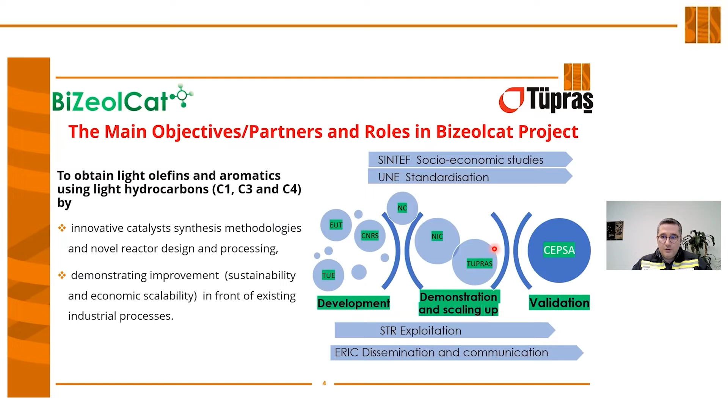So here is the main objective of the BiZeolCat project, to obtain light olefins and aromatics by using light hydrocarbons, by innovative catalyst synthesis methodology and novel reactor design and processing, demonstrating improvements in front of existing industrial process. On the right side are our Bizeolcat partners from development stage to validation stage. As TÜPRAS, we are on the demonstration and scaling up activities of the project. It is work package 4, demonstration and scaling up activities.

The leader was the National Institute of Chemistry in Slovenia, NIC, and we have two tasks in this work package. One of them is related to catalyst scaling up. Another one is the reaction test at the pilot scale. So in task 4.4, TÜPRAS extrudes powder supports that were defined in the development stage of the project and shapes them in pellet form by extrusion process in order to test them in a pilot scale reactor for propane dehydrogenation, butane dehydrogenation, and propane aromatization reactions.

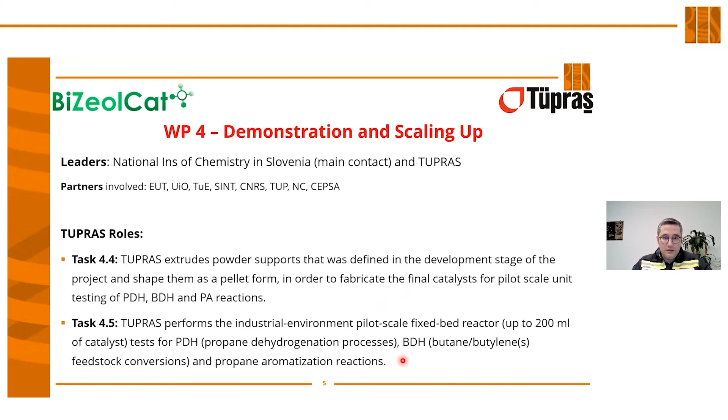In task 4.5, TÜPRAS performs industrial environment pilot scale fixed bed reactor tests for PDH, BDH, and propane aromatization. For the reaction side, today we will discuss and give the results on propane dehydrogenation and propane aromatization reactions.

The final catalyst for PDH and BDH was defined in work package 2 by the technology developers, Eurecat and CNRS. This is lithium doped gamma alumina deposited with platinum and tin. The tin over platinum ratio is 0.7 and lithium is nearly 0.5 weight percent. The catalyst was prepared via a novel process called the surface organometallic approach that was developed by CNRS and Eurecat.

To reach the TRL 5 level for catalyst scale-up, activated alumina catalyst support, gamma alumina, 0.8 millimeter in diameter and 3.3 millimeter in length, has been produced with a classical extrusion process. Our first step is the preparation of the paste. This contains Boehmite particles, and we change the solid loading and the gelation ratio with nitric acid concentration in order to increase the mechanical strength and reach the maximum extrusion yield.

Then, with the paste at optimal properties and viscosity, the extrusion process continued with a die diameter of 1 millimeter and breaking up of the extrudate into small lengths. And then this catalyst was dried at 90 degrees centigrade overnight.

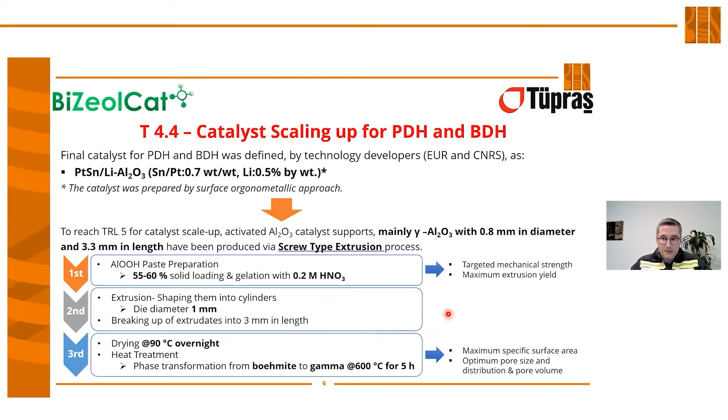And then heat treatment was applied in order to produce gamma phase at nearly 600 degrees centigrade for 5 hours to maximize specific surface area and optimize pore size distribution and pore volume.

Here is the catalyst support production equipment that was installed in our R&D center. This is the Caleva brand extruder 3-in-1 machine. In this machine, we are preparing paste. We can make extrusion, and we can also use spheronizer units attached here to produce a spherical material. This is another mixer in order to increase the capacity, and this is the granulation equipment and also mixing equipment in order to produce kilogram scale material.

In this table, you can see some critical properties of our support. This is the high purity gamma alumina with a very low diameter, and crushing strength is 35 Newton per millimeter. That is enough for the propane dehydrogenation reaction. The surface area is higher than 200 square meters per gram. So we can say that industrial grade gamma alumina support was produced to be used for PDH and BDH for the TRL 5 level.

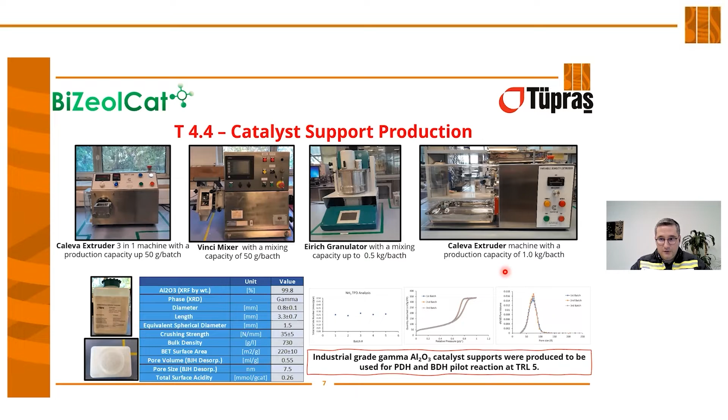You can see in the graph, this was taken from the different batches. This is the NH3 TPD analysis. We obtained the same total acid sites, and we have also the same BET nitrogen adsorption and desorption graph, and also the same pore size with the different sizes. So our production is very robust in terms of the material properties.

You can see on the left side, this was developed by our partner, CNRS, in order to produce 1 kilogram of final catalyst for the impregnation of platinum tin. The preparation of the catalyst, platinum tin on the lithium doped gamma alumina, from 2 grams to 1.1 kilogram has been successfully completed.

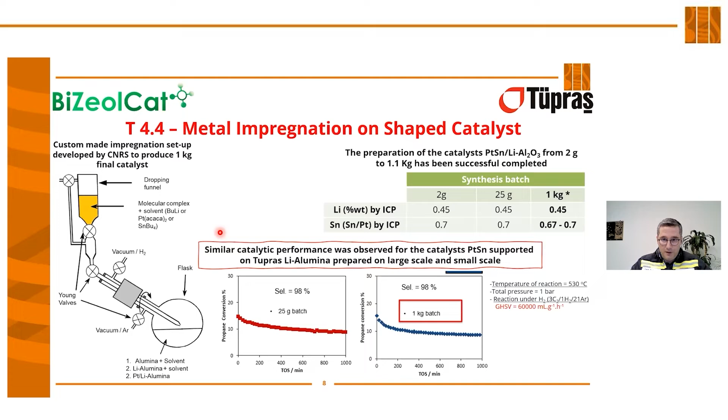And when you look at the ICP results, we obtained very good results when comparing laboratory and pilot scale production. So when we look at the reaction performance, we can say that similar catalytic performance was observed for catalyst platinum tin supported on TÜPRAS lithium doped gamma alumina prepared on large scale and small scale with the same reaction conditions.

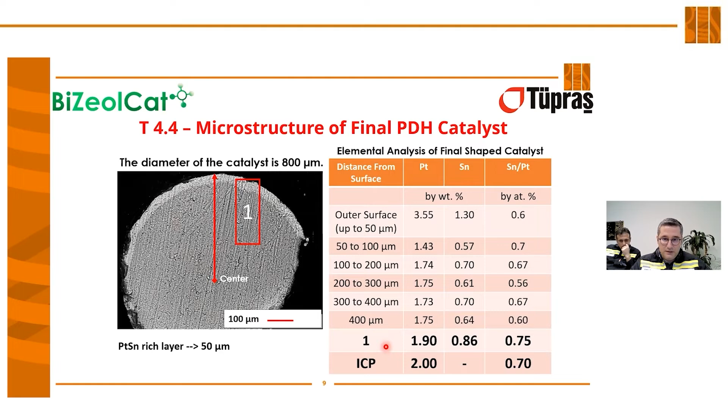So you can see the microstructure analysis of the final PDH catalyst. This is the cross-sectional analysis of our catalyst. We can see the outer side and the inner side of the catalyst. This is the typical distribution of the metal on the support. We have a rich layer of platinum tin on the top of the catalyst, and when we go to the center of the catalyst, the platinum tin concentration decreases. But when we compare with the commercial catalyst, we can say that the distribution is very good, and the results are very similar with the ICP and the SEM EDX analysis.

So I will move to another reaction. This is called the propane aromatization reaction. The final catalyst for this reaction was defined by the technology developer. Here the University of Oslo and CNRS worked on it. It is the gallium modified mesozeolite with nearly 1% by weight of gallium, and the silica alumina ratio is 40 by mole. The catalysts were synthesized by treating commercial zeolite with sodium hydroxide solution to introduce mesoporosity.

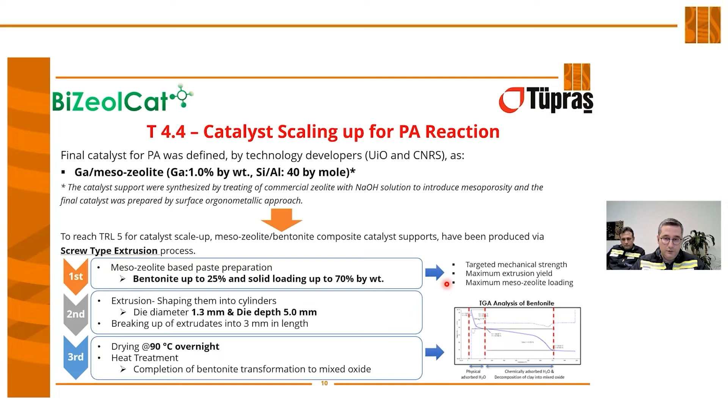This is for the support. The final catalyst was prepared by the surface organometallic approach. This is also a novel technology developed by CNRS. To reach the TRL 5 level, we used the same approach, but this is a little bit different because we used bentonite, and we changed the bentonite ratio and the solid loading in this composition in order to increase mechanical strength, reach the maximum yield and the maximum mesozeolite loading to improve the catalytic activity.

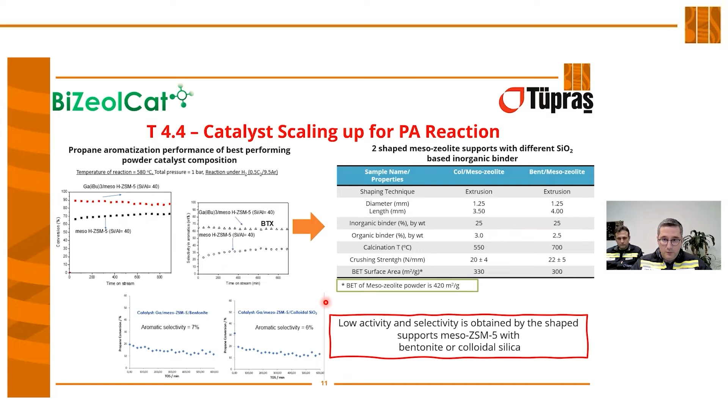So we had to improve this performance by reducing the inorganic binder and also reducing the calcination temperature after shaping. This can be explained by the reduction of acidic protons seen at 4 ppm in the solid state NMR results. When we add inorganic binders, this peak disappeared. When we increase the calcination temperature up to 700 degrees centigrade, we also have an acidic proton peak in the spectroscopy, but the intensity of the peak is lower.

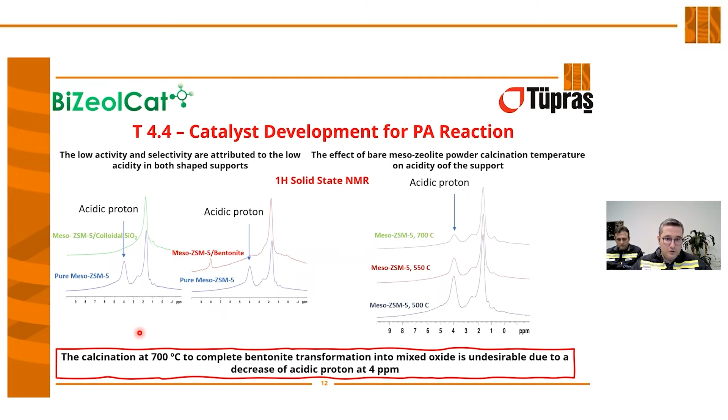So the calcination at 700 centigrade degrees to complete the bentonite transformation into the mixed oxide is undesirable due to the decrease of acidic protons, and it reduced the catalytic activity. So we decided to reduce both calcination temperature and inorganic binder in order to increase the reaction performance.

When you look at the right side, the propane conversion and the mass selectivity to BTX are lower than the powder, but we have very promising results on the propane aromatization. You can see on the left side the material properties, and this is the picture of our catalyst.

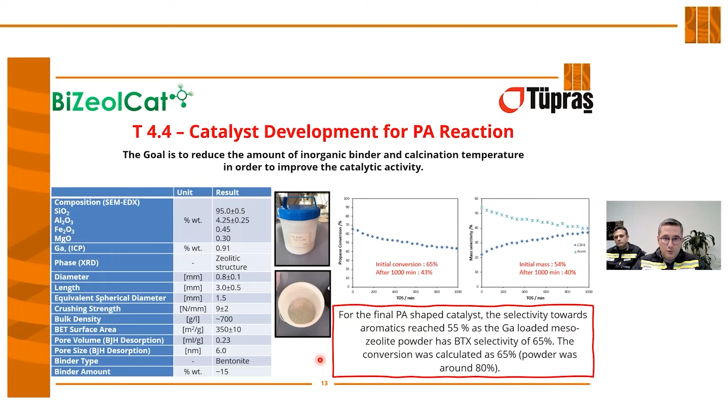For the final shaped catalyst, the selectivity towards aromatics reached 55%, whereas the gallium loaded mesozeolite powder has BTX selectivity of 65. The conversion was calculated as 65%. The powder was around 80. So we have reached similar, promising results, but we reached higher results after modifying our extrusion formulation. Then my colleague Serdar will continue with the pilot scale reactor system.

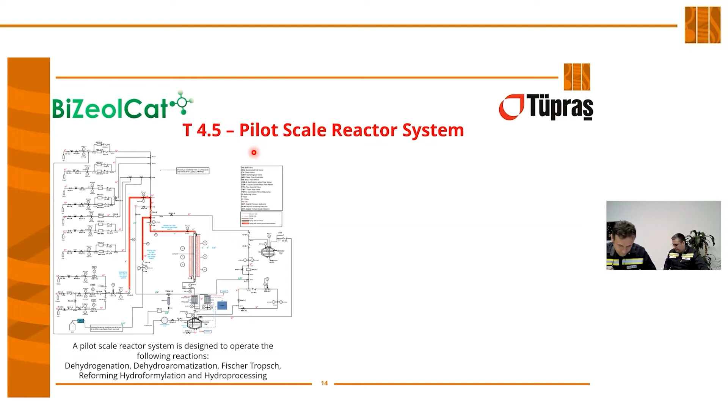Thank you, Cem. Serdar is speaking from Turkish Petroleum Refineries Corporation. I will continue with task 4.5, the pilot scale experiments and our reactor system. Our pilot scale reactor system, called X2L, enables us to do dehydrogenation, dehydroaromatization, Fischer-Tropsch, reforming, hydroformylation, and hydroprocessing type reactions. Of course, this is a custom-made system specially designed for the BiZeolCat project.

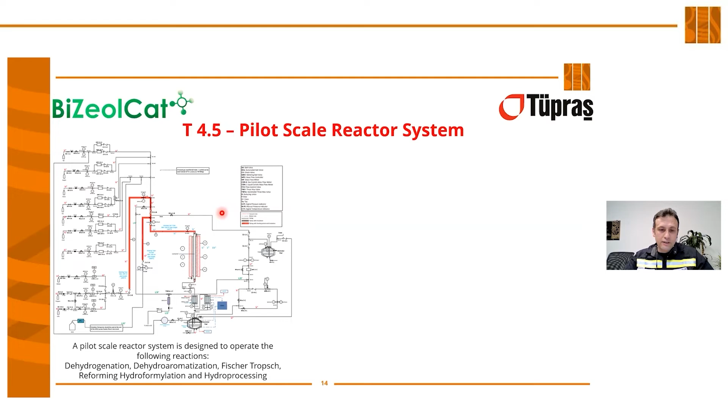This system has its own chiller system. Also, we have a water condenser at the outlet of the reactor. We are collecting the liquids in our collection vessel, and this system can be operated at these high temperatures. The system is also coupled with an inline gas chromatograph, micro GC, and we are measuring the inlet composition and the outlet composition of the products.

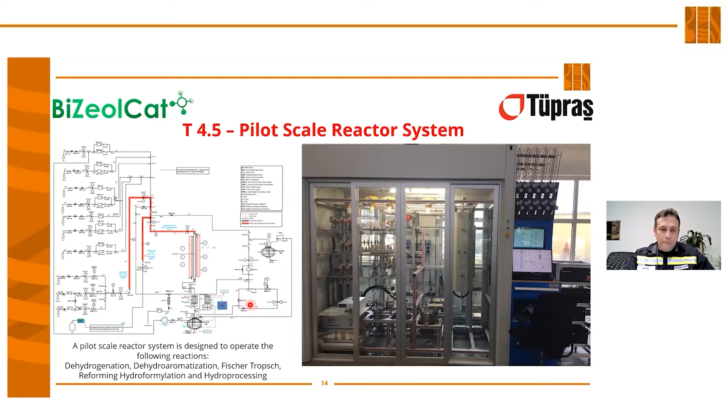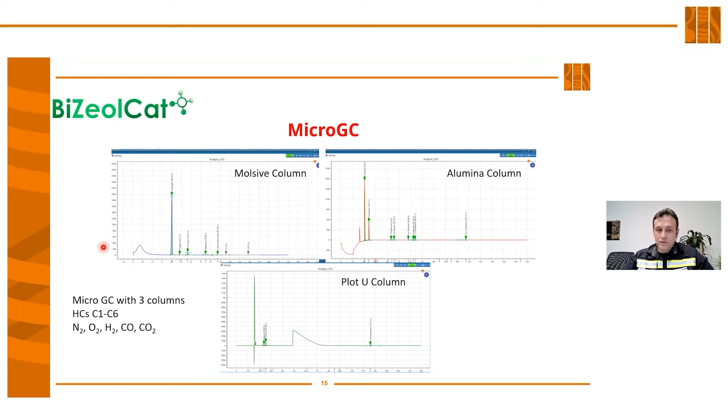The micro GC is coupled with 3 different columns. One of them is the mole sieve column, the second one is the alumina column, and the PLOT column. These 3 columns are capable of measuring different kinds of molecules, including hydrocarbons C1 to C6, and also nitrogen, oxygen, hydrogen, carbon monoxide, and carbon dioxide.

And how we load the reactor. This reactor system allows us to use different diameter reactor tubes, 1/2 inch, 1 inch, and 1.5 inch. We used the 1.5 inch reactor diameter in propane dehydrogenation and propane aromatization reactions. We are loading the catalyst diluted with silicon carbide in the middle of the reactor tube, controlling the reactor externally, and measuring the reactor temperatures inside at 3 different locations.

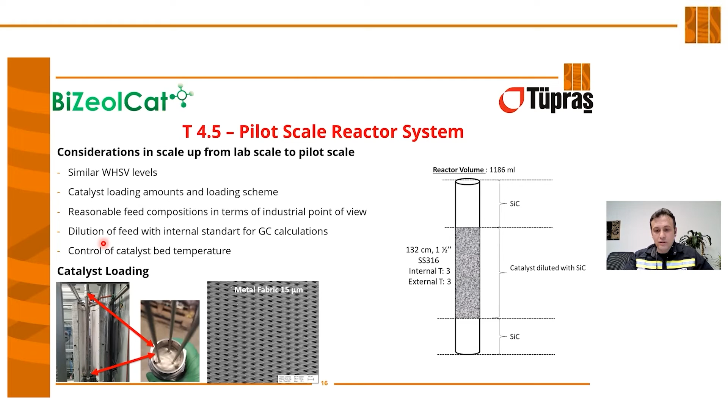We are very good at controlling the catalyst bed temperature, but of course the external temperatures are almost 50-60 degrees higher than the internal temperatures because of the endothermic nature of the reaction. Let's start with the propane dehydrogenation reaction performance at pilot scale. We did a lot of different experiments at lower scale, around 12.5 gram, and all of these reactions are completely repeatable.

We controlled the reaction temperature outside at 590 degrees, and the internal temperature was around 530 degrees Celsius. We maintained the weight hourly space velocity around 5.7. We also feed hydrogen in order to get rid of coke formation during the course of the reaction. Here you see 10 hours of operation. It's a continuous operation, by the way, almost 36 hours of complete operation, including the reduction of the catalyst.

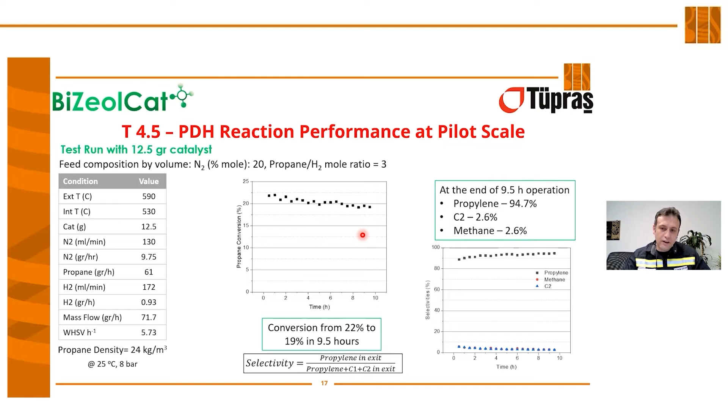We maintained around 95% selectivity at the end of around 10 hours of operation. In this reaction, we also obtained C2s, ethane and ethylene, and methane around 2.6%. The reaction started with 22% propane conversion and ended up around 19% at the end of 10 hours. And we increased the catalyst capacity for the next round.

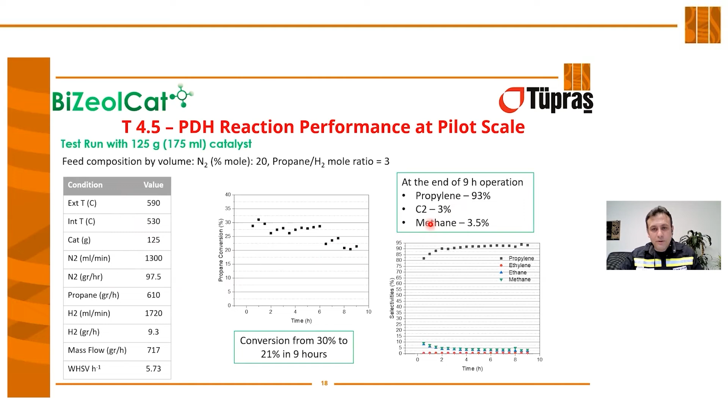It is now increased 10-fold to 125 gram in the fixed bed reactor, and we used, of course, a 1.5 inch diameter reactor tube. The conditions are almost the same as before; we started with a higher conversion which dropped to 21% in 9 hours, and we maintained the propylene selectivity around 93%, and the C2 and methane selectivity is almost the same as in the previous one.

When we come to the propane aromatization reactions, we were actually surprised a lot when we got the results, because working with such a reaction at pilot scale is very, very difficult because of the aromatics, especially the benzene that you obtain as a product. And you have to be very careful in handling these kinds of products.

Our external reaction temperature is around 625 degrees Celsius, and the internal temperature was 580 degrees. And the amount of catalyst is 42 grams. This reaction actually is validated in the lab with argon, not with nitrogen. But of course, it's very difficult to find argon in an industrial environment.

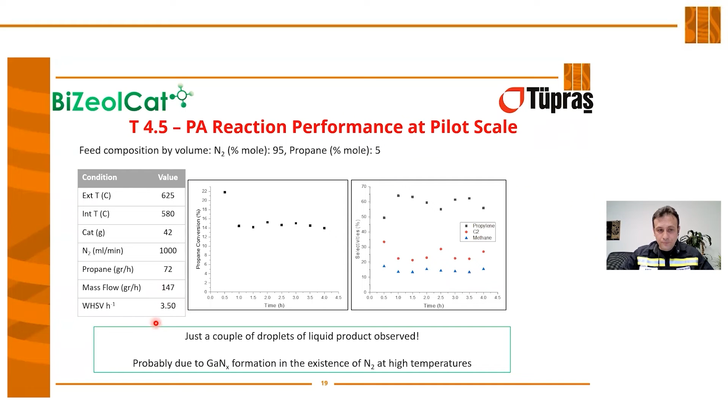Therefore, we first started with nitrogen in order to see what is the effect of nitrogen in this reaction at pilot scale. Of course, we obtained almost nothing, just a couple of droplets of liquid product observed in the chiller section of the collection vessel. And therefore, we decided to go to the argon flow with the same WHSV values. We tried to fix that value and the propane flow, and accordingly change the catalyst amount in order to fix these values. And the propane aromatization reaction performance with the argon flow at the flow capacities is tabulated in this table.

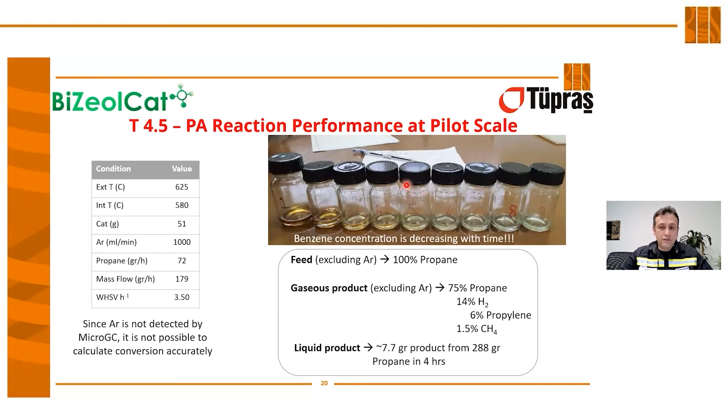We obtained liquids in each hour, as you see in this picture, and the product color is yellow. And during the course of the reaction, after 5 hours, 6 hours, the color becomes transparent. And we understand that the benzene concentration in the initial phase of the reaction is higher than in the final phase of the reaction. And we of course tried to validate these results with the detailed hydrocarbon analysis. And we repeated the reaction once again.

And here you see the products. We obtained the same color change during the reaction. And you see that during the course of the reaction in 10 hours, the total aromatic mass concentration was always above 95%. All of these liquids are almost completely aromatic. And here, when we look at the detailed hydrocarbon analysis, the C6 concentration, you see in the orange one, is decreasing with time, and C7 concentration is also decreasing, and C8 concentration and also the hydrocarbons higher than

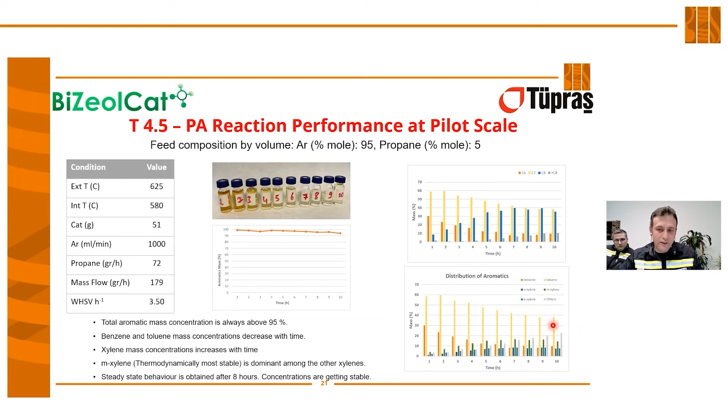C8 were increasing. When we look at more details, the distribution of aromatics, especially the ortho-xylene, meta-xylene and para-xylene concentrations are increasing, and the C10 concentrations are also increasing. Among the xylenes, meta-xylene, thermodynamically the most stable one, is dominant. And we obtained a steady state behavior at 8 hours, and concentrations are getting stable after this point. And when we look in detail at the C9 and C10 hydrocarbons, we get ethyl toluenes and trimethyl benzenes mostly in the liquids, and also some propyl toluenes in the C10 fraction.

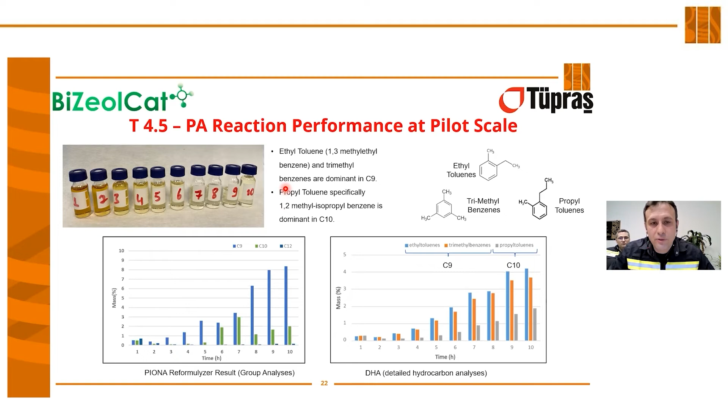Therefore, propane aromatization reaction is shown at pilot scale. We collected this liquid, by the way, by chilling the outlet of the reactor at -10 degrees, because you cannot condense this product at room temperature. You will get nothing in the collection vessel. You have to decrease that temperature below minus degrees in order to condense all of the outlet stream, especially in that diluent stream, because 5% propane is given in 95% argon.

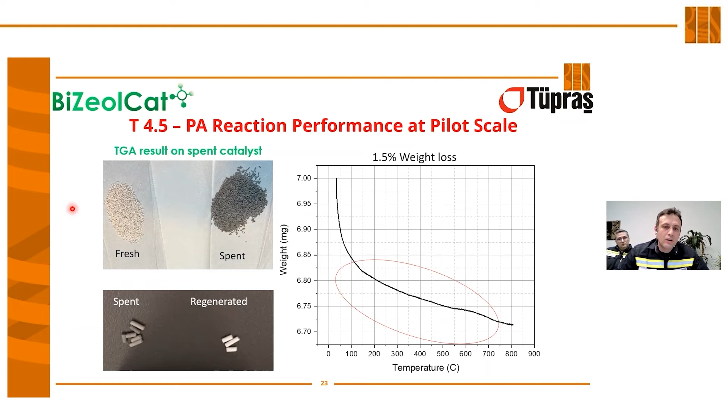And as a conclusion, the propane dehydrogenation and propane aromatization catalyst scale-up has been completed in collaboration with the technology developers. And here you see the best performing propane dehydrogenation catalyst and its performance; the catalyst support was shaped via an extrusion process, starting from aluminum oxyhydroxide particles. And we obtained almost thermodynamic conversion, around 20% in ten hours, and selectivity was around 94–95%.

And the best performing PA catalyst was around 1% gallium loaded mesozeolite. And of course, the conversions are really low, but we obtained some kind of reformate, as in the refineries. We call it reformate from propane. And it was quite surprising for almost all of the refinery people in TÜPRAŞ, because normally we produce such aromatic product from heavy naphtha, not of course propane. And this kind of reaction is really important for the utilization of propane rather than using it for LPG. Therefore, it's very important for refinery integration in the future.

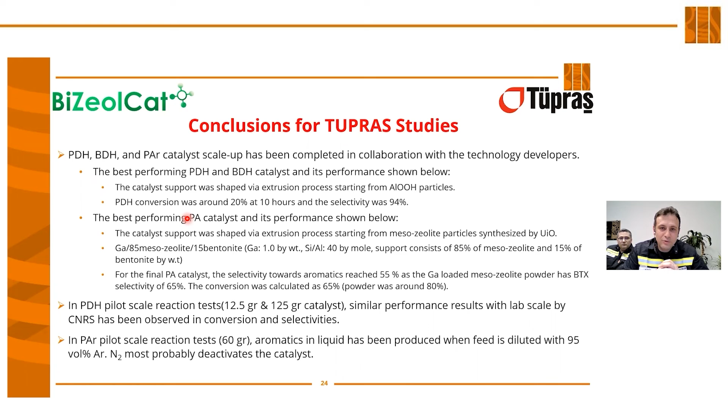This is our presentation. Thank you very much for your attention. If you have any questions, I'd like them to be answered with Cem.

Thank you, Dr. Çelebi and Dr. Açıksarı. We do have a few questions for you online. Before that, we have a question from our room.

Thank you for your presentation. It was very interesting because you prepared the materials but also evaluated their performance. Have you tested the spent catalyst to see if there is any change in the morphological or structural characteristics of the catalyst?

Actually, we didn't. We only checked the carbon deposits on the catalyst, but we didn't check the formation or restructuring of the gallium particles on the catalyst. But of course, after the initial phase of the reaction, the catalyst itself is changing. It's not stable, we believe.

Okay. And another question is, do you have facilities to do wash coating, let's say to have a monolith and then to wash coat the catalyst on the surface of this monolith? We don't have that kind of equipment in our laboratories, but we are just using extrudates in our facilities. Yeah.